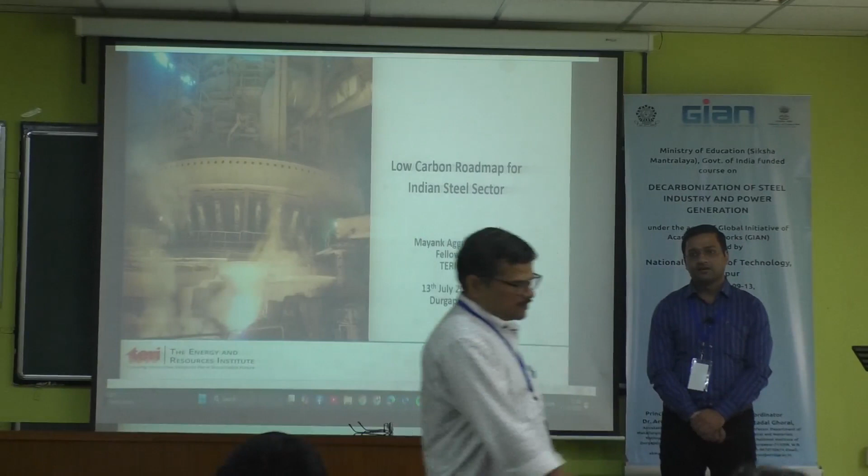Good afternoon. I am Mayank Aggarwal, fellow, TERI. I am a metallurgist by training from NIT Bhopal, and I can see here in NIT Durgapur two elements of NIT. Yeah, it's good to be here. Thank you, Professor Mandal, once again. And we at TERI is

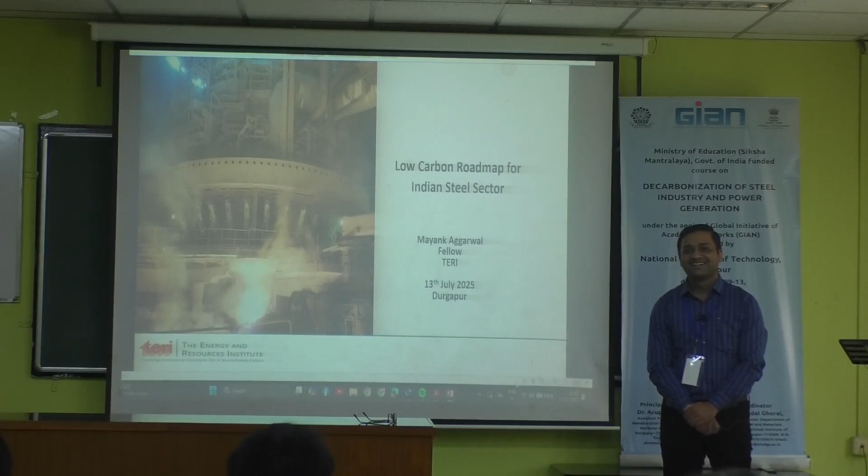Just a casual question. How did you get into TERI? Like, what was the? We gave an interview. I'm like, you had a background in something sort of. Yeah. So I started my career with IBM from campus placement, and then I worked for 8 years in SAIL Bokaro Steel Plant as a production engineer.

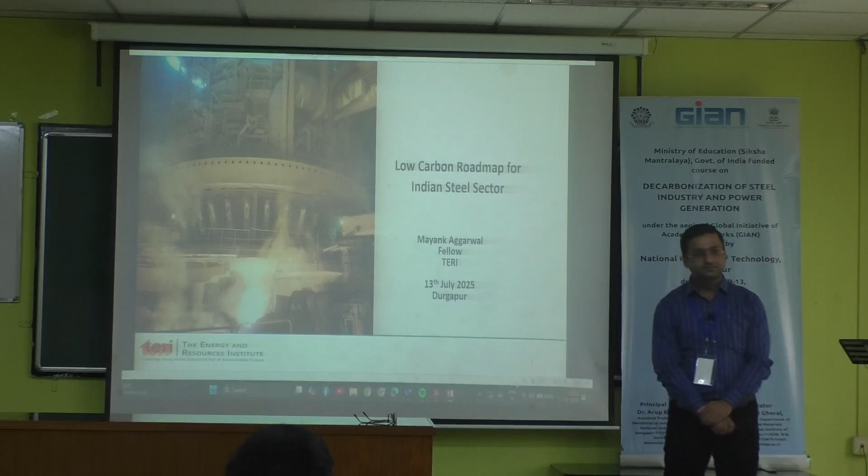Then somehow I got this vacancy from LinkedIn. It's better than SAIL. Yeah, the exposure TERI gives is much wider than SAIL. I'm still working with SAIL. Few of our projects are with SAIL. So not only SAIL but with other ISPs also. We are in talks with JSPL, with JSW.

We keep on organizing events where we collaborate with all the steel producers, policymakers, and peer group institutions, academia as well, for policy decisions or at various platforms for various reasons. So TERI was started in 1970s when it was felt that there is energy crisis, and people from Tata Chemicals found that we don't have any institution, some kind of organization was required, how we can deal with the energy crisis in future.

So in 1974 it was started as Tata Energy Research Institute, and it started working on energy related projects where it started collecting data. Then few publications were there like TEDDY, annual reports were presented. Those were in public domain. Then in early 2000s, it was felt that now TERI has international presence and it has to be an independent organization. And then the Tata name was dropped and it became The Energy and Resources Institute.

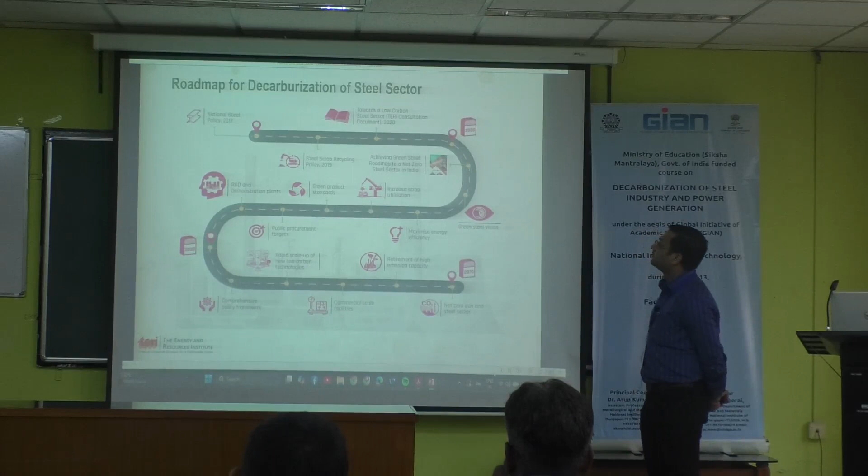It started in 2017 when the National Steel Policy came. It gave the target that by 2030 we will have a capacity of 300 million tons per annum, and we will be producing around 255 million tons of crude steel. Despite COVID, I think we are on track to achieve it. How? 300 million tons of capacity and 255 million tons of production.

From now, 2025, it is 140, and within that, 152 million tons we have produced last year? 141. So let's say 150. So within 5 years we will double, get around another 100. JSW, Tata Steel and others are expanding. Why are they expanding? Mostly takeovers? No. I think JSW people will be better able to answer me.

Yeah, some are under investment stage and some plants are under construction. So we need 5 years to complete the expansion. How much will it increase the capacity? Maybe in Tata and JSW it may touch about 50 million. 50 million capacity? You just told me that 150 million tons was last year's production. Yes. And Tata Steel and JSW together will go for another 50 in the upcoming years. So it will touch 200.

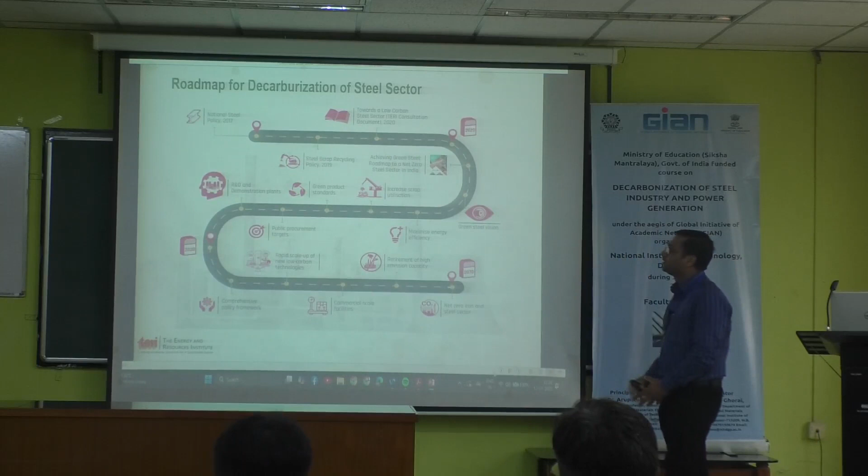Then I think India will be ready for decarbonization RD&D projects by 2030, and then things will move on according to the conditions.

So increase of scrap utilization is not in the plan right now because we don't have scrap. See, it is in the plan, but it's not reality. Of course, we don't have the legacy scrap. Everybody knows; people from industry are here. In the roadmap there is a plan to increase scrap utilization, but it's not possible. From where will scrap come, sir? It was in the plan, but it's not possible.

I am saying, once we start the plans, then we can explore the possibilities in the international market. Then we can find the alternatives to scrap. Maybe DRI can be charged in blast furnaces. If we have green DRI, hydrogen-based DRI, or less emission-intensive iron, then we can go towards green steel. And yes, government is focusing on increasing scrap. The vehicle scrappage policy came; although it didn't go well, I think it will pick up in some time.

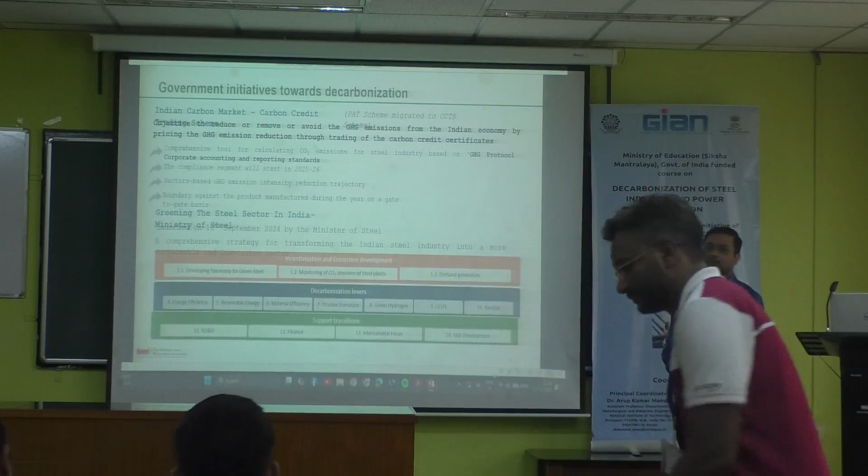So even now, I haven't seen any new gas-based DRI plant coming up in India. All the expansion is going on the blast furnace route, and even coal-based DRI producers are either going for bigger DRI furnaces, or trying to get a small blast furnace, whatever they can afford. So basically, the focus is towards blast furnace. What is the main reason for this? Technology, proven technology, high capex. High capex in DRI.

See, you have a risk. We don't have natural gas. In this region, CBM is available, but in what quantity? And the production cost is too high. Coking coal chains, if we are procuring, although we are vulnerable from the price point of view, of course it is cheaper than natural gas. So from this perspective, whosoever is investing 6,000 crore rupees per million ton capacity doesn't want their capex to be in doldrums.

So phasing out blast furnace by 2050, isn't it a great challenge? Of course, it is a great challenge. Let's say breakthrough technology comes. Let's say green hydrogen is available at 1.5 to $2 per kg. Professor Naushad yesterday was telling that in Australia they are targeting $2 per kg by 2030. So where is India in that scenario? See the National Green Hydrogen Mission targets. We are expecting green hydrogen to be in the range of $1.5 to $2 per kg by 2030. How is it possible?

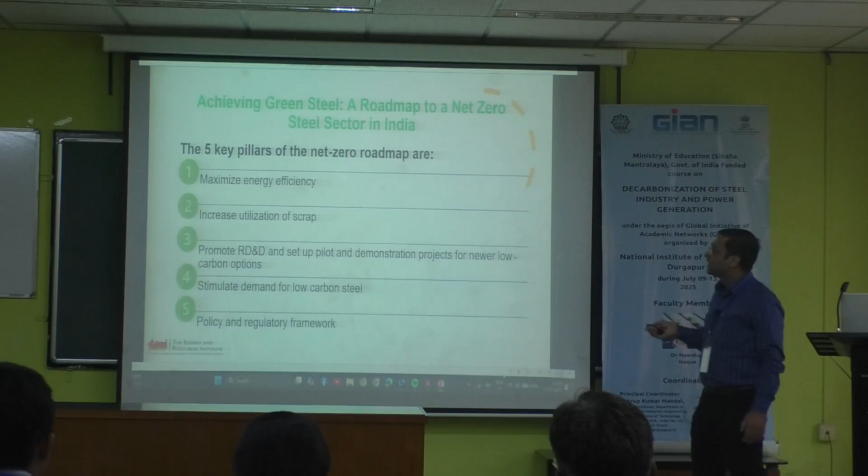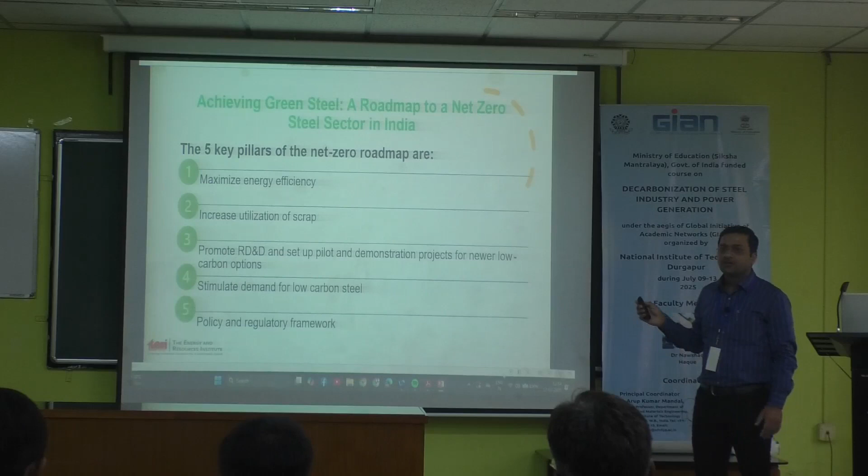achieving green steel. These are the key pillars that we identified in our roadmap. Maximize the energy efficiency; these are the low-hanging fruits that can be achieved. Then increasing the utilization of scrap. Then promote RD&D and set up pilot demonstration projects. Then stimulate demand for low carbon steel, maybe in premium projects, maybe in premium cars. Then policy and regulatory framework to achieve these targets.

Then in energy efficiency, BATs can reduce energy consumption by 10 to 15%. This has been identified in the task force also, that it is a potential of integrated steel plants, and the potential is more in SSIs. These are the low-hanging opportunities. It can be adopted as a short-term measure in all the steel plants.

Best available technologies. For example, in integrated steel plants, dry quenching technology, TRT, yes, re-heating furnace, or scrapping the ingot route process altogether. Right? Or now strip casting technology is available in the market at commercial scale. Primetals has that technology. So these kind of various technologies, waste heat recovery systems in DRI plants, and so on.

Then this is the energy consumption that we found in integrated steel plants. 6.5 gigacal per ton is the Indian steel industry average energy consumption. But with the BATs, we found that 1 gigacal per ton of crude steel can be reduced easily. The energy consumption in the Tata Steel plant we found was 5.3 gigacal per ton of crude steel, while in SAIL it is around 6.3 to 6.5 gigacal per ton.

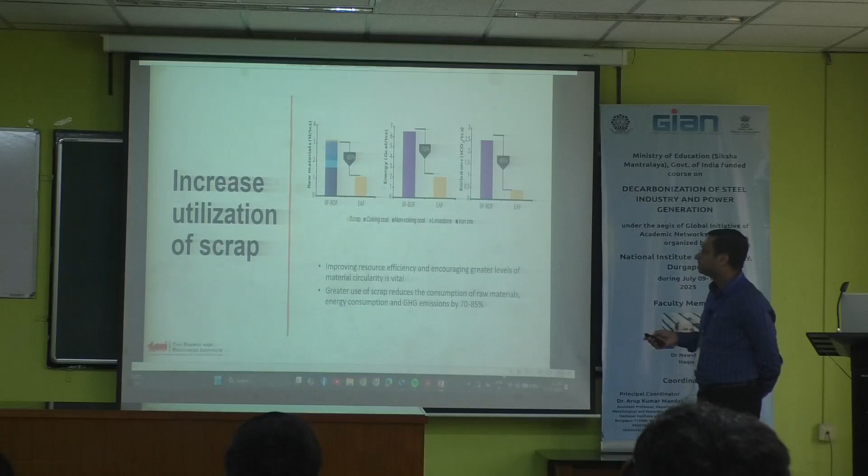With increase in scrap utilization, we can reduce all raw material consumption, lower logistics cost, energy consumption, as well as the CO2 emissions. So this is the best possible way of producing low emission steel. Then of course these are at theoretical level right now. CCUS or using green hydrogen is a bit practical, but MOE, molten oxide electrolysis, is a lab scale technology.

Then we need to have some PPP type of agreements between Government of India, private players or public steel players to develop a technology, and for decarbonization it will be a key step, because it will mitigate the risk. Then a suite of policies will be required for demand side and for supply side. If we classify them for decarbonization, hydrogen route and CCS route are the two major routes that we have identified, maybe different combinations.

Then in CCUS route, how do you utilize the carbon? See, one such utilization potential is in fertilizer industry for urea production. CO2 can be captured. If we are talking about green hydrogen, then green ammonia will be the basic requirement for producing green fertilizer as well. And combining ammonia with carbon dioxide molecules produces urea. And here we have a huge potential of using this CO2 from maybe steel industry or cement industry or whatever.

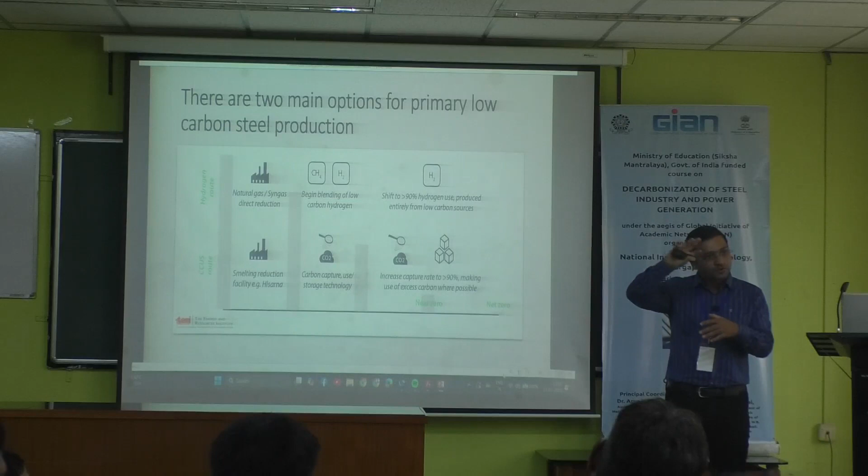At present, I think. See, in most of the urea production plants in India, CO2 capturing is an integral part of urea production. So, CO2 capturing also needs some energy. A lot of energy is required. And in ammonia production process or in urea production plant, there are a lot of reactions which are exothermic and there are a lot of things which are endothermic. The costs are less.

But when we interacted with the industry and the domain experts, we found that if we take green ammonia and if we take captured carbon and produce urea, then the chains have to be optimized accordingly. It will be not the same as the current production process or manufacturing process of urea.

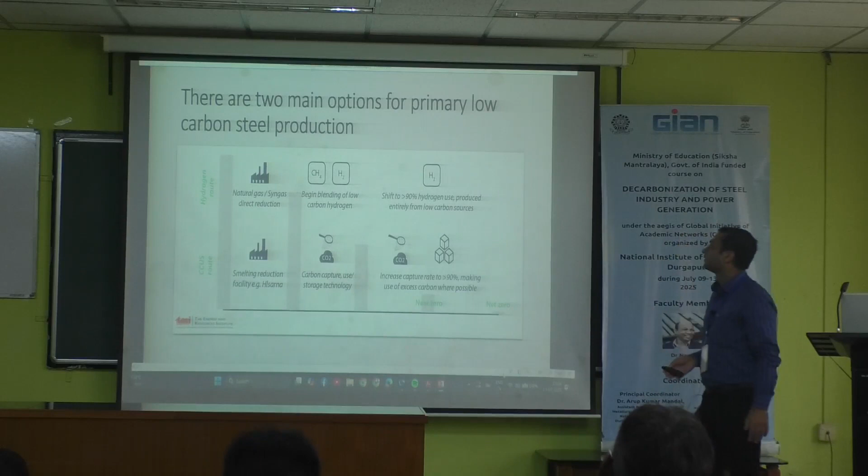So you can see the green hydrogen. If we use green hydrogen, how the cost compares. See, we use grid electricity. Of course, it is not at all viable. With the renewables, there is a better possibility. And hydrogen produced from natural gas has much more potential to be utilized in hydrogen-based steel production. And again, coal, the cost is high.

This natural gas or syngas to play a transition role, as I already mentioned. JSPL is having a syngas-based plant that is unique in the world, but their emission intensity is a bit higher than the current steel producers. Coal is converted to syngas and then it is being utilized for DRI production. So, although in the short term the emission intensity may be higher, it could be a risk mitigator for the long term. When green hydrogen is available, these furnaces can directly switch to green hydrogen based DRI.

The whole story starts when green hydrogen is available, isn't it? Yeah. Yes. Yes. And at a cheaper rate, of course. Of course.

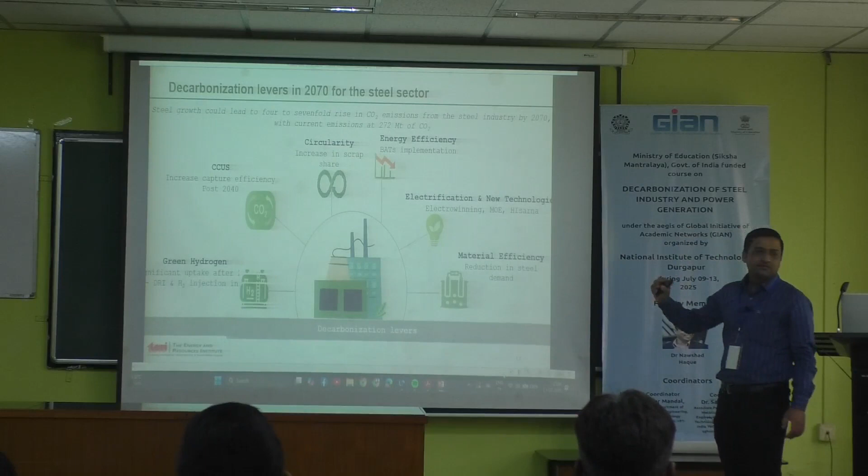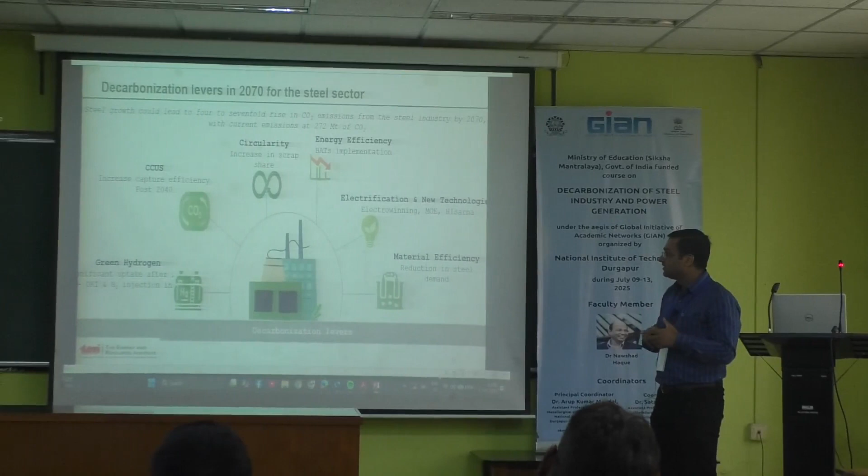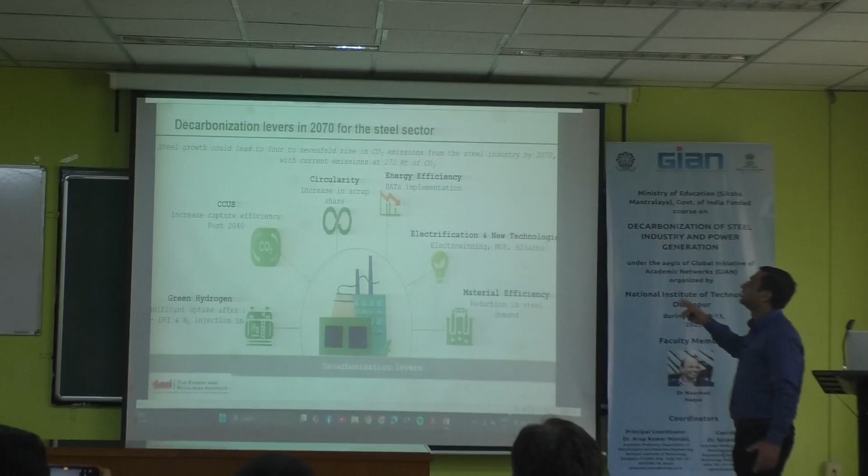Then the decarbonization levers for 2070, we did an analysis how things will move on in the current scenario with the policies in mind, with the interaction with the stakeholders, industry, research institutions. We found that green hydrogen has the most important role to play in India's steel industry's decarbonization. Then CCUS, we are expecting that capturing efficiency will attain the optimized level by 2040. Then circularity, it means increase in scrap share. Energy efficiency, it's a short-term measure, but it will be fourth in the potential. Then electrification and new technologies.

Electrification, we are not saying that it will kick off immediately, but we can expect a few projects to be of commercial scale by 2050 or so. Then material efficiency means we will reduce the steel demand by creating some better alloys. Like these days, even 650 MPa grade steels are available compared to 10 or 15 years before, when the strength used to be 450 MPa. Consumption will be less, right? So we are expecting that this is going to play a significant role in decarbonization of the steel industry.

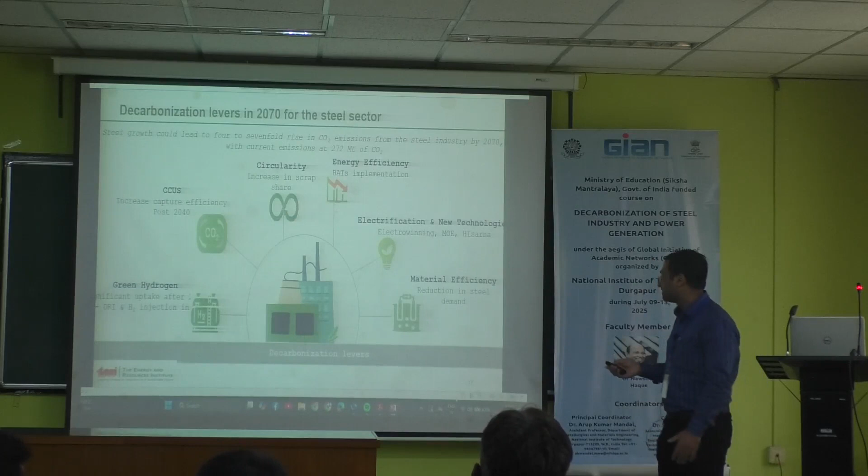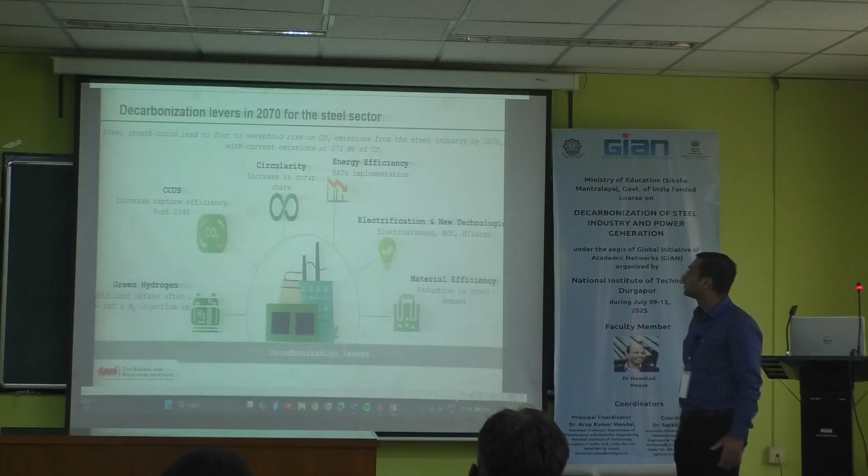So this is a summary of decarbonization levers, how the technological scenario will change in each decade. Can you go back to the previous slide? By industry by 2070, current emission of 272 million ton. Current emission of CO2 in steel production. Total India's emission? India's total industrial emissions are around 1200 MT. No, I mean total India's. India's total will be around 2500 million tons CO2. Sorry, 2500 million tons of CO2 per annum.

It's almost 2.5 billion ton. Yeah. So of 2.5 billion ton, steel industry is 272 million ton. So what percentage is that? 10 to 11%, but the general figure revolves around that. Which industry is the biggest contributor? Of course, steel. Not the power sector. See, in the power sector, there are two things.

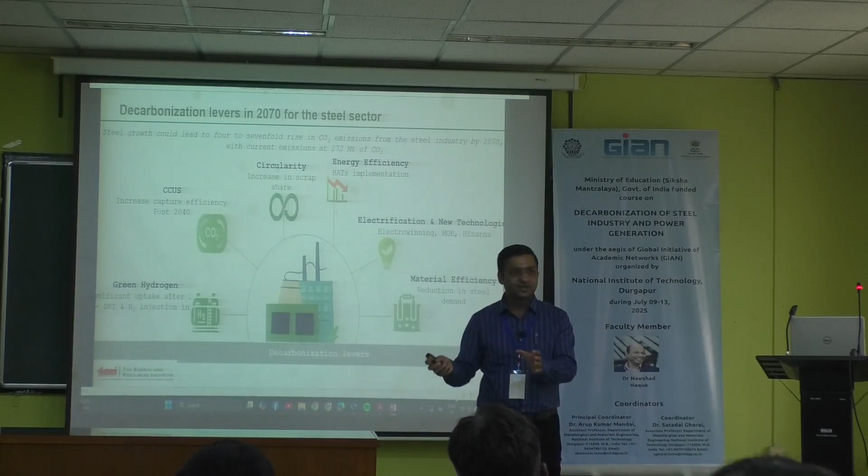First, whatever power industry is consuming, and the power domestic sector is consuming. So, if you combine all the power together, of course it is the biggest contributor, but if you divide it into domestic and industrial sector... So 3 billion ton is everything, right? 2.5 billion. It's a way of seeing things, right? Whatever you are saying is right, whatever I am saying is also right. What is the percentage of power sector? See, I can't remember right now, but we have reports, you can refer to those and find those numbers.

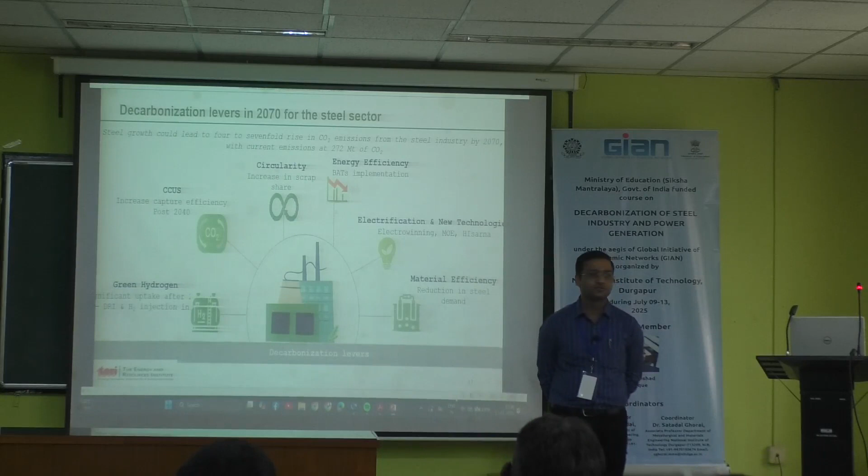This is the technological scenario. I think in 2070, scrap EAF, then EAF, EAF route will still be there with CCUS, and then molten oxide electrolysis or electrowinning process will be there, and hydrogen-based DRI will be a major share of steel production.

The challenge is again low TRL levels of these technologies, low penetration of existing low carbon technologies, high capex and opex of newer technologies. This is the reason the industry is expanding in blast furnace. So lack of ecosystem and infrastructure. If we talk about hydrogen, then this is a challenge. Then high cost premiums, of course, cost of capex and opex contributes to this.

Then lack of net zero policy mandates and standardized definitions for green steel or green products is not there. Although this has been taken into consideration by various ministries, including Ministry of Finance, because of this budget in the current year, they are aiming to define the low carbon products. And I think these challenges are well taken up by government, by various ministries or various departments. In the coming time, we can expect that things will change.